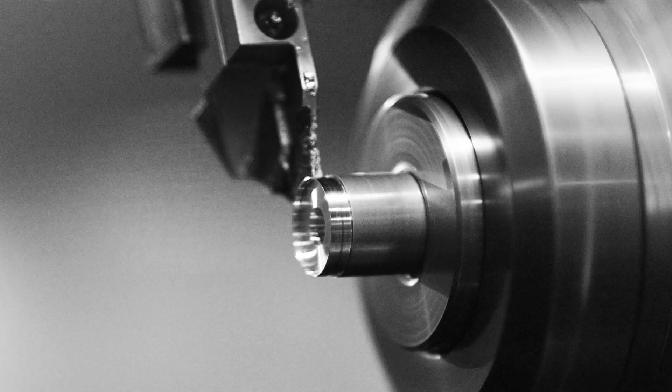Today I'm here with Dave and he is from Cadspec. Dave, you're here to talk about Fusion 360 today. Can you tell us a little bit about it, please?

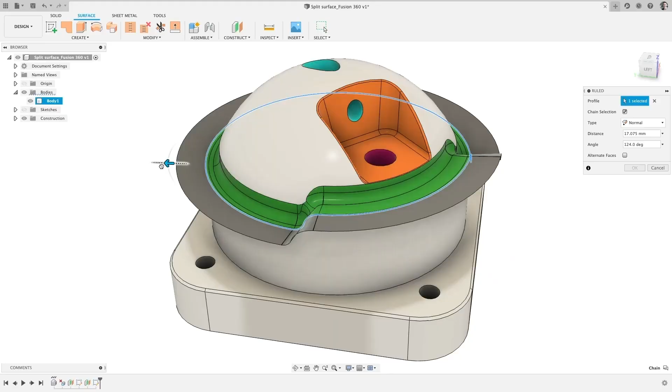Yes, certainly. Well, Cadspec are a gold reseller for Autodesk, and we're certified to supply the CAM software from Autodesk, and one of those is Fusion 360. Fusion 360 is the new kid on the block. It's a parametric solid modeler. It's a hybrid modeler, so you can design in solids, surfaces, or mesh if you want to reverse engineer and produce working drawings from those designs.

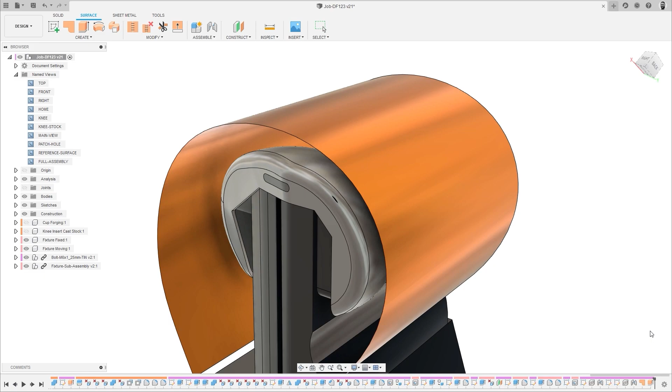Yeah, it's pretty much all-encompassing now, but if we start at the basics, what disciplines does Fusion cover? Well, Fusion 360 allows you to design and manufacture, so the parametric modeling and the manufacture, which is the CNC machining. So we can design, we can CNC machine up to 5-axis and possibly more in the future. We can design in sheet metal, nesting, we've got electronic design, printed circuit board design, we've got the ability to produce generative designs and stress analysis.

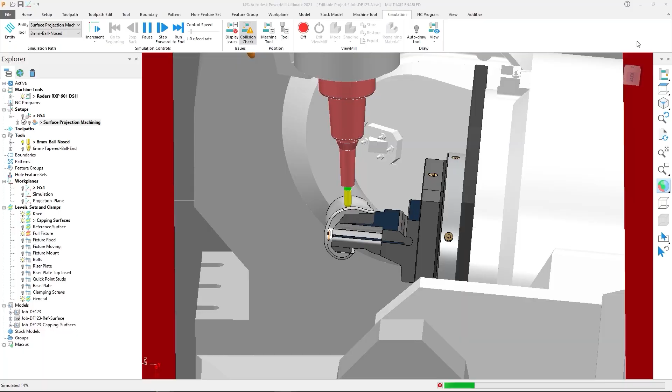We all know about stress, right? So stress analysis and mechanical event simulation. So a lot of functionality in a very affordable software. 100%. So if you talk about design and manufacturing, it's worth pointing out you're talking CAD and CAM.

Yes, definitely. Yeah, so we've had Cadspec in the studio before. We've talked about the integration of what I call power products, so PowerMill, PowerShape, PowerInspect. You know, why was this done initially? And just leading on from that, why was it done? Well, the idea is that Autodesk want to, and they are committed to bringing the functionality of the power products

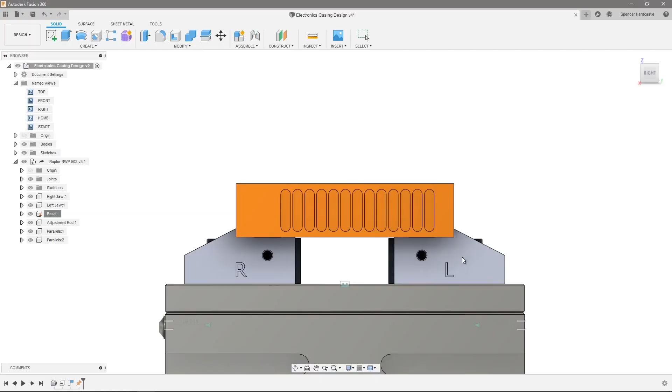into Fusion, including FeatureCAM as well. And the idea there is so that eventually we'll be able to design and manufacture on the same platform. So if you update the design, you update the manufacturing. So all the functionality from PowerMill and FeatureCAM and so on is slowly being transferred into Fusion 360.

But if you buy it at the moment, if you buy PowerMill at the moment, you get Fusion 360 with PowerMill. If you buy FeatureCAM at the moment, you get Fusion 360 with FeatureCAM. Yeah, it's worth pointing out you don't need to subscribe to all the products, do you? Fusion 360 is like, I guess, the head of the family. Yes. And you bolt on whatever you want from there.

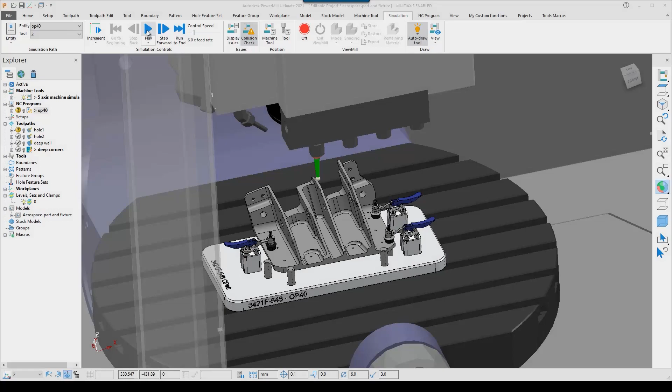That's right. But going forward, we're hoping that a company would buy Fusion 360 and then purchase the engineering extensions or manufacturing extensions for what they require to do. So at the moment we have steep and shallow machining, we have in-process probing, we have automatic hole recognition already in Fusion, and then we're hoping, of course, more are going to be bundled into it in the future. Sure, and it's worth pointing out you've been doing this a long time now.

Yes. For engineers, there's lots of CAD and CAM solutions out there. In fact, it's not the only CAD CAM solution in the market. So what makes this appealing to engineers, having it all potentially all in the same suite of software?

Well, first of all, it's affordable. Engineering companies want more bang for their buck, as the Americans say. So you've got that, but also one of the big pluses for me with 40 years experience with CNC machining is the fact that you can actually bring the CAD data from the customer, and instead of importing it, you can actually use something called AnyCAD, which links the data to Fusion and then use that to program the CNC code for your machine tool.

And then if they decide, and a lot of the time they do, to change the design, you overwrite the file with their design, the link updates, your CNC machining updates. So you've got a fantastic flow of data, a fantastic workflow from the customer's design to machine part.

That is something we hear a lot when we visit Autodesk customers.

File management, I guess, is another way of calling it. And the fact you can share files, you can maybe take some of the data out of the file. So if you want a tooling package, you can send that file across the cloud securely and essentially take a lot of the information out of it, certainly information the tooling supplier doesn't need.

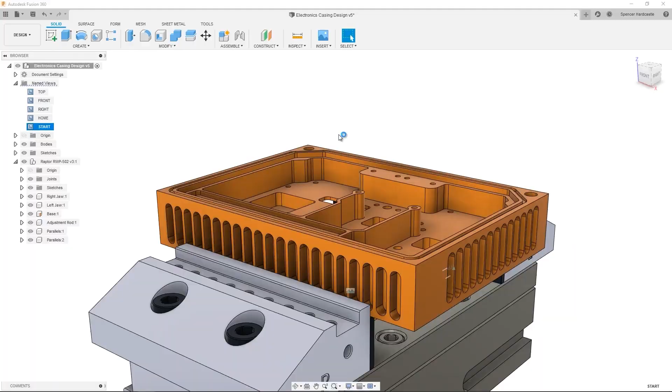That's right. And of course, one of the most important things is Fusion is cloud-based. So your files are held securely on the cloud. It means that you can go anywhere in the world to a machine, whether it's a Windows machine or an Apple Mac, download Fusion, log in using your account, and the files are there for you.

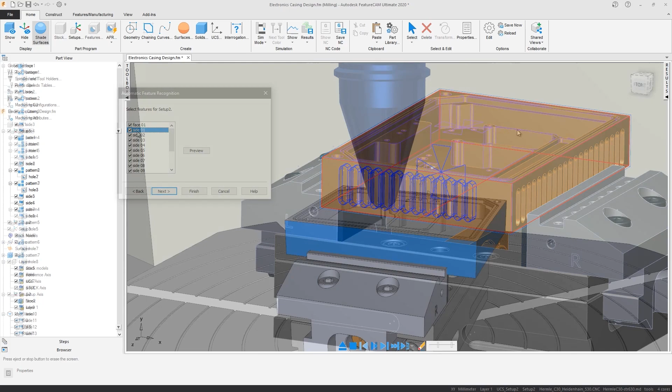You can also share the files on a team. You get a Fusion team with the software now. So as a group, you can have a team of users sharing the same data.

And I think that's really important. How many times have I gone to a machine shop, 20 machines, 15 operators? Where's that file? You've got Dave, Sue, Becky, Richard, all using different posts. Even though it's the same machine, different files. It's crazy, isn't it?

Yeah, this cloud is so powerful. Very much so, yes. And over and above that, you can actually share your data with somebody who's using Windows, an Internet Explorer type package, to view the models and to redline and make notes about them.

Obviously, Cadspec, you're well known for supplying engineering related software. You're equally well known, if not more so, for offering post support, like post-processor support, training and ongoing aftercare. So can you tell us a little bit more about this?

Well, certainly. We've decided to make the CAM training more modular, because not everybody wants to machine a mill and a lathe at the same time. They may only have lathes in their factory, for instance. So we've made it more modular, which is more affordable to them.

But also, a CAM system is only as good as its post-processors. So we have a team of engineers at Cadspec who create and edit post-processors for the customers. Even though Autodesk have got libraries of standard post-processors for machine tools, customers normally, and certainly the operators, tend to want changes done to the post-processors, or they may get a machine in that's not got a post-processor for it at the moment. We can write them and edit them.